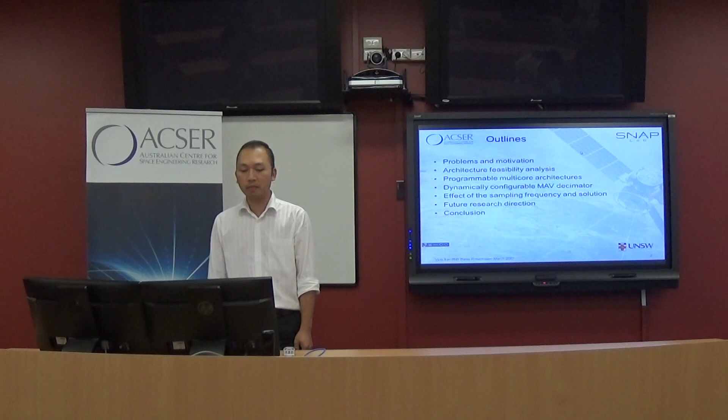That is an outline for today. Of course, everything starts from the problem and motivation. After that, it is my analysis on the feasible architecture that can be applied for multi-GNSS receiver. And after that, some proposed architecture that can be applied for multi-GNSS receiver. And the last thing is some work more related to signal processing, about the effect of sampling frequency, and the solution for this.

I think it's much more familiar to all of us now, because instead of only GPS, now we have 3 more global navigation satellite systems like Galileo from Europe, BeiDou from China, and GLONASS from Russia. But not only global navigation satellite systems, we also have regional navigation satellite systems like QZSS from Japan and IRNSS from India.

So what happened? It means that now there are more satellites. There is the availability map for the satellites. We can see that Australia is one of the areas that have the highest coverage of satellites. So we have a lot of benefit from this.

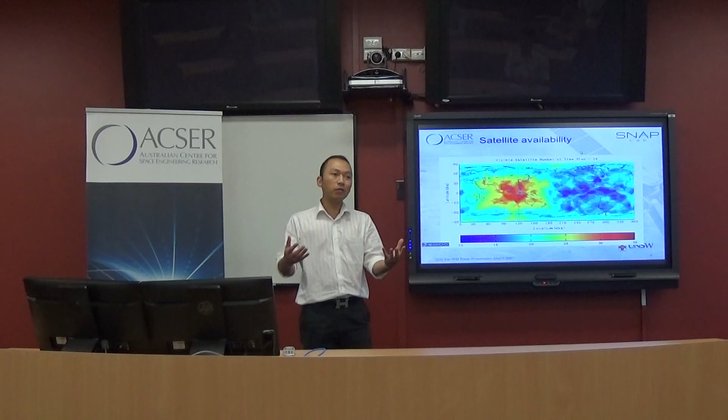Not only that, now we have more satellites. Of course, more satellites mean that at any time, instead of only 4 or 5 satellites, you can have 10, 12, or maybe 15 satellites at one time. And the second thing is that if we can integrate all of these satellites together, we can improve the accuracy and increase the integrity.

Yep, that is some motivation for this. The first thing is the urban canyon. When you drive through the urban canyon, sometimes, for example, when I drive through the CBD, instead of showing on your navigation, like TomTom navigation, that you are driving on George Street, it will show you driving on Flinders Street or maybe Elizabeth Street.

So the problem here is that the urban canyon blocks the signal. Instead of receiving the line-of-sight signal, you will receive some reflected signal. That's why the navigation receiver will show you the wrong position instead of the right one.

So if you have more satellites now, you can receive more line-of-sight signal. The second thing is, of course, for surveying, that's precise positioning - you can improve this. And also for aviation and for agriculture. With aviation, you can improve the accuracy for the auto-landing system, or improve things like the self-driving tractor, and also self-driving car.

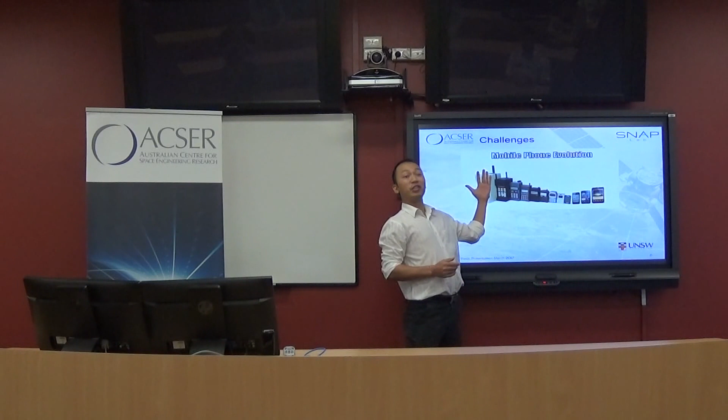But there's also always a challenge. There is the mobile phone evolution. You can see that it's gone from very brick-like, getting smaller, and now large again. So that is the benefit here, that the small thing can help you reduce the size.

But because it's integrating too many chipsets onto one chip, power consumption becomes a problem. And now, for the important smartphone with the big LCD screen, it's going to consume huge power. So battery becomes the trouble. That is the trouble of the battery - performance versus battery life.

It also affects the GNSS receiver the same way. With a single chip receiver, you can have more battery life, but if you want to integrate more receivers inside one, it requires high power consumption.

So starting from these challenges, I try to classify some physical architecture that we can apply for a multi-GNSS receiver. I separated this into two big categories: the first one is software receiver, and the second one is hardware receiver. This is the first attempt to classify it like this.

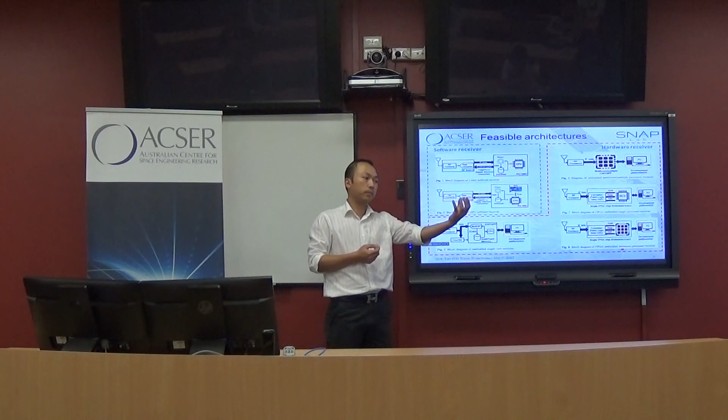For software receiver, we have the full software receiver. This means you only need the receiver connected directly to the PC, and everything you process on the PC is a software receiver. The second one is using the GPU, meaning using the graphical processing unit to process the signal. That is for software.

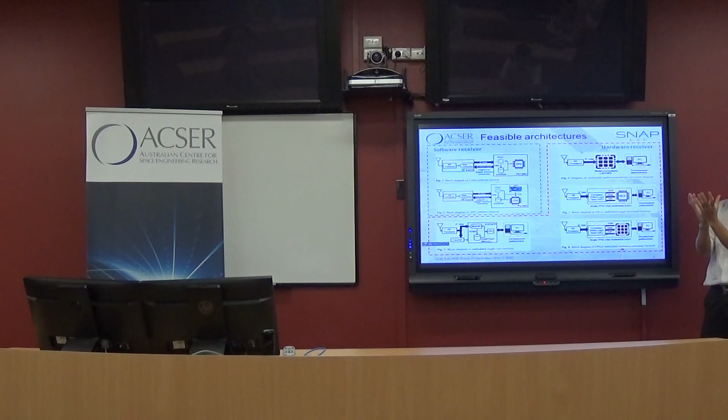For hardware, we have four more types. The first one is the embedded single core processor. The multi-core processor means you have a board, and this processing, instead of using the PC, is now like an MCU or a chip inside a board, processing like a receiver. The last one is where we try to integrate everything inside one chip, from a single core to multiple cores.

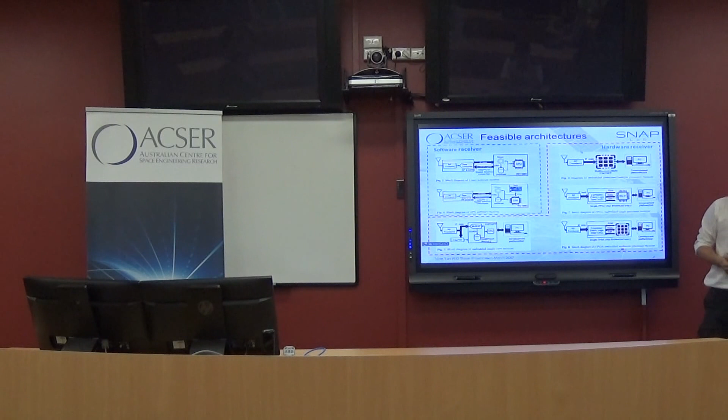So what's the problem here is that we have too many options. How can we evaluate this? What is the feasible architecture, and which one is the most suitable for a multi-GNSS receiver?

With this demand, I propose a cost function that can evaluate all of these architectures based on 6 characteristics. The first one is development cost. It means how much money, how much manpower you need to develop a receiver.

The opposite of this is programmability. It means how you can reuse all of your resources. For example, with a software design, you can reuse your class designs or methods when you want to combine and make a new one. But for a hardware receiver, you can't do the same thing.

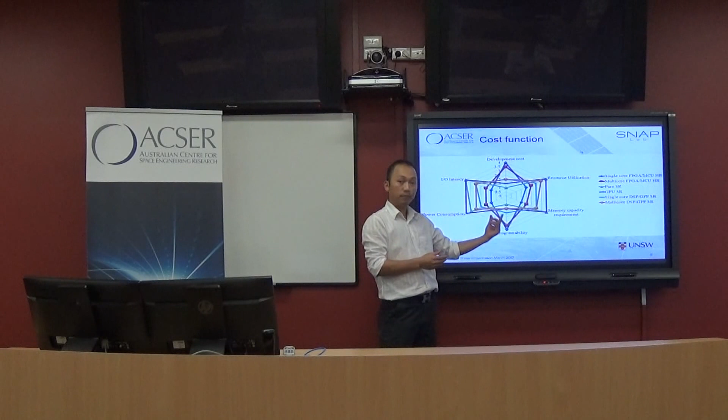The other characteristics are power consumption and resource utilization. Of course, more resource utilization also means more power consumption, and vice versa. The last thing is I/O latency and memory capacity requirement.

The important thing here is that when you receive the signal, it goes straight from the front end. So if the I/O latency is very high, then you need memory to store the data before you can process it. But if you can process it immediately, you don't need memory to store the data beforehand. So these are the 6 characteristics I propose to evaluate the physical architecture.

In this case, I try to normalize all of these characteristics and draw them in a web chart. You can see here that none of the existing architectures can provide the minimum requirements for a multi-GNSS receiver.

So from this, I propose 2 more architectures that, in my estimation, are much more suitable for a multi-GNSS receiver. The first one I call the fully programmable custom core.

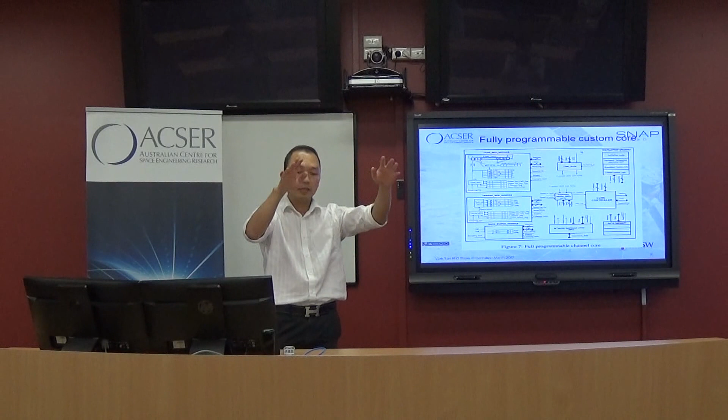Usually in the design you have the correlator inside an FPGA, and the tracking and acquisition can be on a PC or an MCU. So I try to put all of this into one chip and design this core with a dedicated instruction set, only for GNSS receivers.

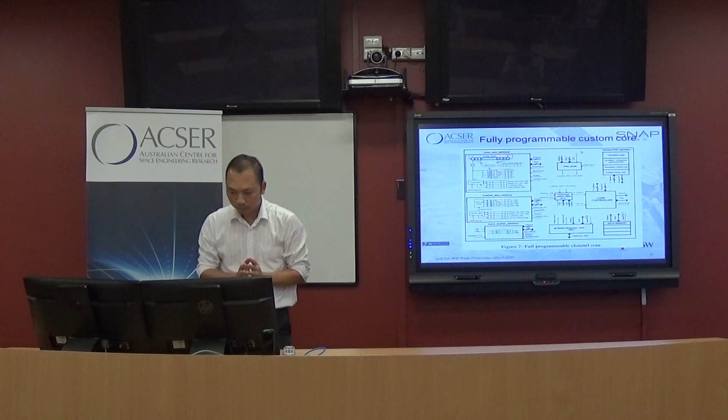And this is the memory map, along with some instructions and quantities. After proposing this, I also apply the cost function to evaluate it, and you can see that in this case it can reduce these costs.

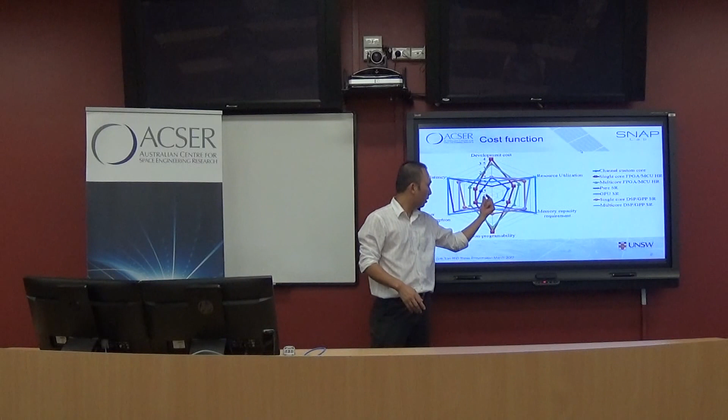But it's still not the most minimum one I need, because the problem is the constraint on processing speed for the custom core. I designed only 16 bits for the data part, so it can only process 16 data samples at the same time, and after that I have to repeat the routine again. Because of this constraint, it's only suitable for doing the correlation.

If we also want to do acquisition and tracking inside this custom core, it can only provide support for GPS L1 CA. But if you also want to use this for L2C, L5, or E1, it's not suitable.

So the problem here is that it only comes from the correlator, because the correlation has to keep real time, and every time you receive one sample, you have to continue and keep processing it.

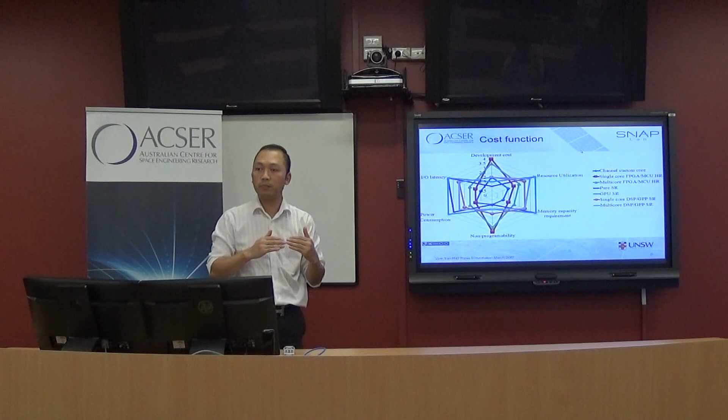So I propose the other architecture here, a new dedicated pipeline correlator connected to the core controller, with the channel counter and the graph selector to process this. I'm starting from this idea.

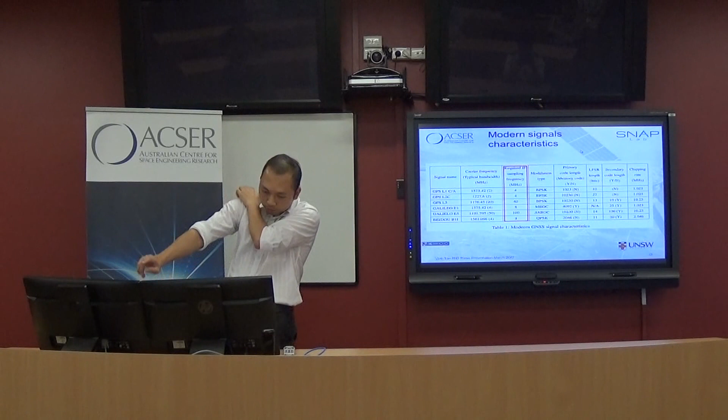For all GNSS signals, the required IF sampling frequency is usually very low, like 4 megahertz, and at max only like for E5 it's like 100 megahertz. But it's still much lower than the processing performance of the FPGA.

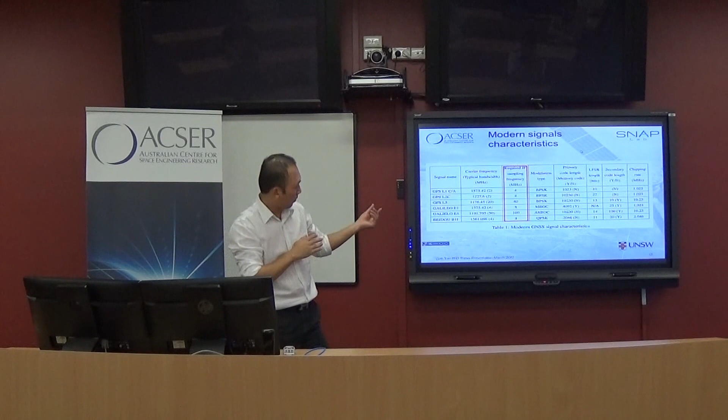So instead of doing this in serial, why don't we multiplex this? It means that in one hardware, you multiplex to process multiple channels, because the processing speed requirement here is very low.

So to do this, I propose a programmable pipeline baseband circuit. It's still doing the same thing.

But now, because of the lower processing speed and inheriting the advantages of RAM-based register over register-based register, with this architecture I can directly program and multiplex process like 16 GPS L1 CA channels in one resource. In that resource, for only one channel: 8 BeiDou, 4 Galileo, and 1 GPS L5 channel, in only one design.

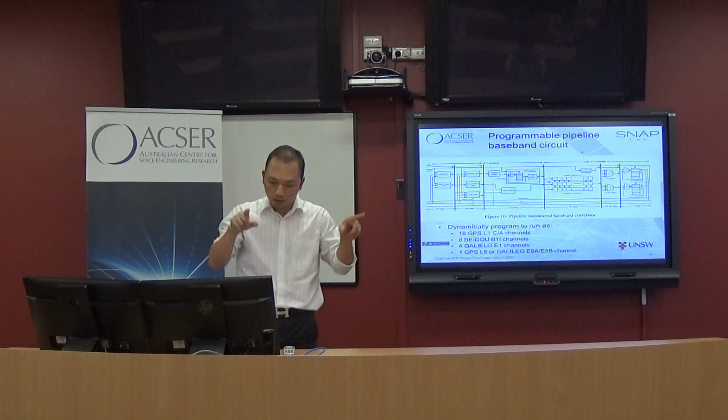So in this case, you can see that resource utilization is significantly reduced compared with the conventional one, and also with the fully programmable custom core. It only consumes like 5.2% of resource utilization, and the power consumption is also reduced.

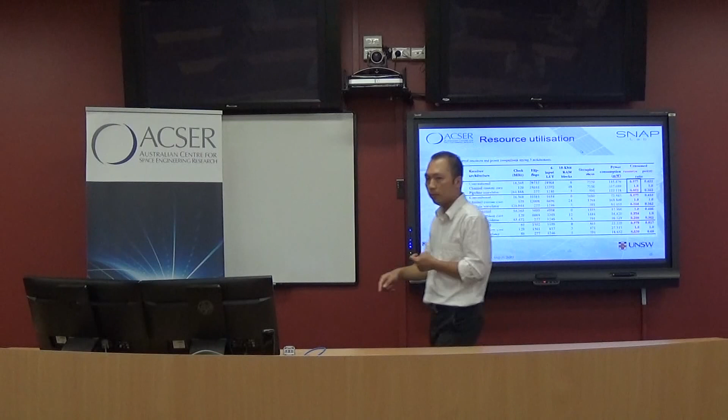This is the comparison for power consumption. In all cases here, when I configure this architecture to process, it only has the smallest power consumption, and at least it can reduce nearly 50% of power consumption.

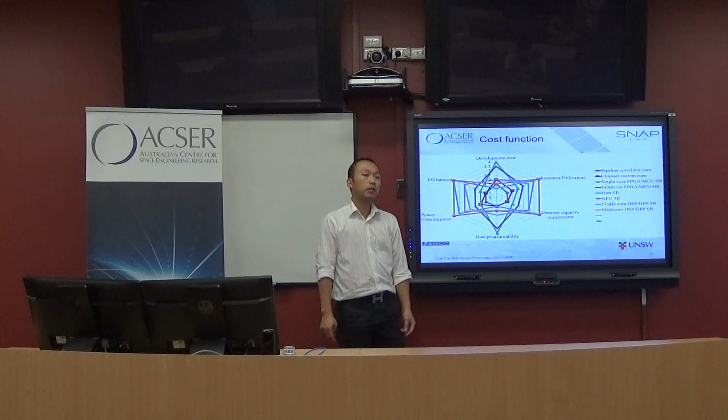And finally, when I apply the cost function to evaluate, the pipeline correlator programmable architecture has the minimized cost function, or the needed one here. This programmable architecture has the lowest cost function.

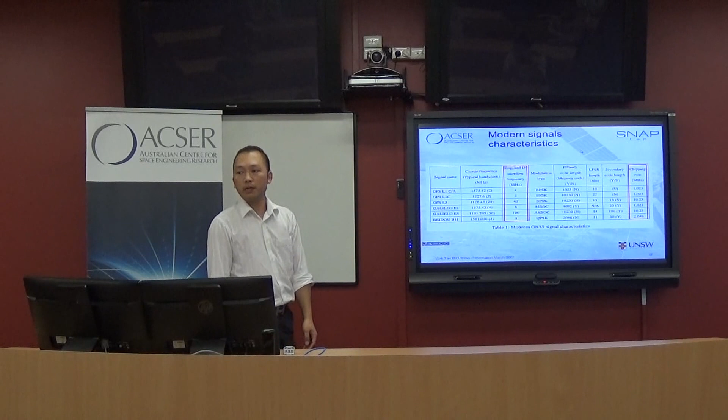The other thing here, from the modern signal characteristics, is that the sampling frequency is usually a bit like 4 times higher than the chip rate. So after we wipe off the carrier, we don't need to process at very high speed, because if we increase the speed, it also increases power consumption. If we can reduce the processing speed, we can reduce the power consumption.

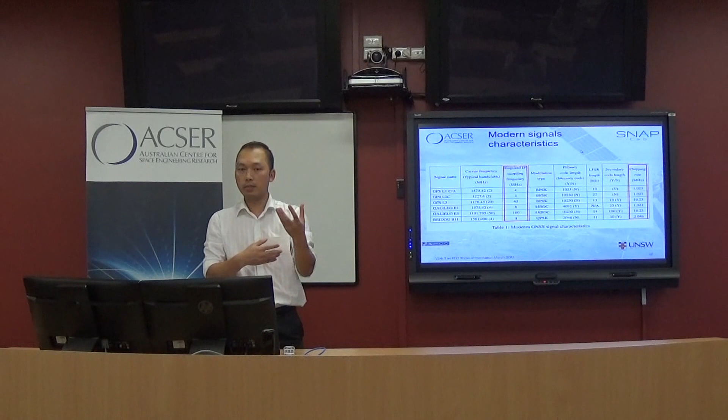So starting from this idea, because the sampling frequency is too high, if we can decimate or downsample the sampling frequency after we down-convert the IF signal to baseband, we can reduce the power consumption.

But there's always a problem with decimation here: when we decimate any signal, we need an anti-aliasing filter, otherwise we get aliasing from the high-pass signal. Usually for other decimation filters, they use a very complicated filter to remove the aliasing.

But here, I started thinking that when I try to draw the frequency response of the moving average filter, for example 4 times moving average, this is the frequency response of that.

And also the correlation is also working like a second filter, because this is the matched filter when you try to match the local code with the incoming signal. So it's also like a second filter here.

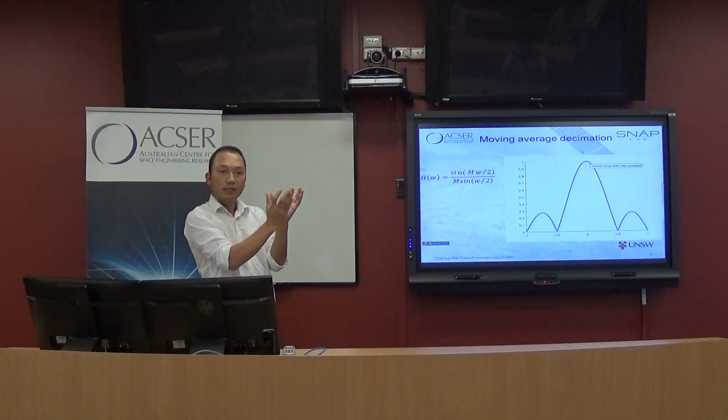So instead of only filtering the signal here, the anti-aliasing filter is working at filtering the power signal, this is the power spectral density of the spreading code signal. After we apply the filter, you can see that of course we lose some signal, but the shape is still the same.

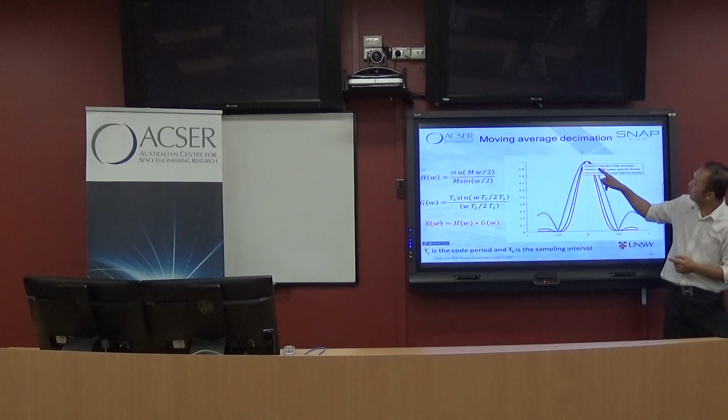And the most important thing here is that the main lobe is still kept the same, but we can also reduce the side lobe. So that's very good for tracking the BPSK signal.

So this is the conventional, they call this the recursive MTAP, MAV, the moving average decimator architecture. If you want to have an MTAP, you need at least the MTAP and bit register. After moving through this, we use the adding and the subtract to get the output signal.

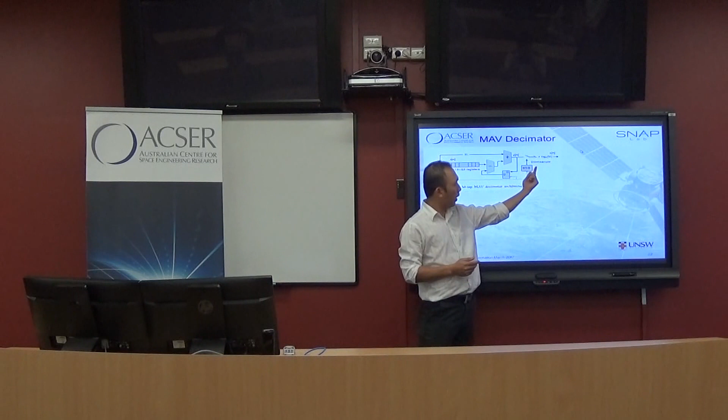Every time after this, if you want to have the downsample rate, you need a ratio to get the frequency you want to downsample. But in this case, it's very difficult to make it become very configurable, because every time you want to do this, you have to enlarge or make smaller the number of registers you need here. So it's not suitable for making it become very configurable.

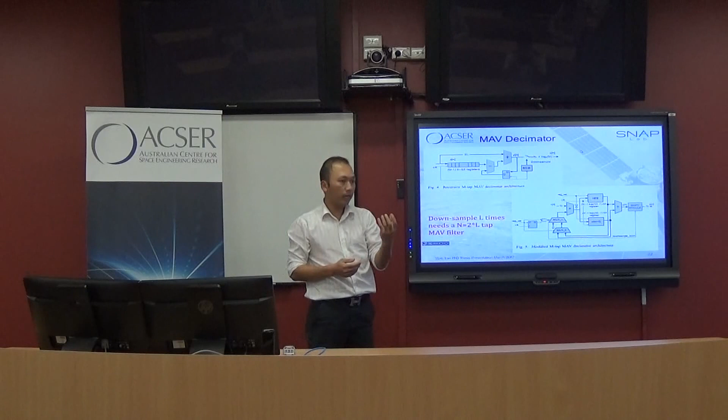So I propose a new MAV decimator here. The idea is that we always try to downsample as a power of 2. If you want to downsample by L, we need N equal to double of L for the decimator. With this, you can separate it to store in only 2 registers, and use the latency signal to get the output signal here.

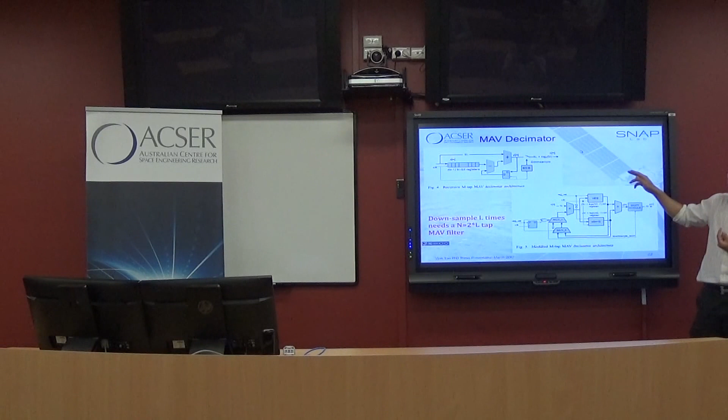It's like power of 2 times power of 2, the power of 2 division of the input sample rate. The other thing here is, because they only have add and subtract, the output bit will increase. But in my case, because it's only a power of 2, I only need to use a modulo to make it become exactly n plus 1 bit. So we don't need more bits, and we can still reduce the resource consumption.

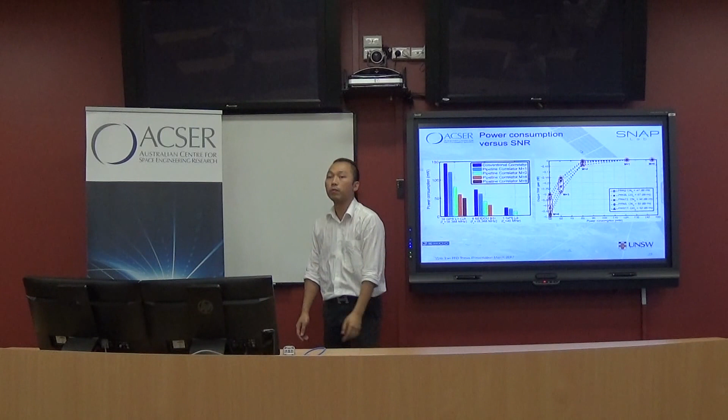Also in terms of signal to noise ratio, the output signal after correlation, we usually have like minus 0.5 dB. So this is the loss of signal power in terms of the signal to noise ratio. So it is still worthwhile to do this here in terms of saving power.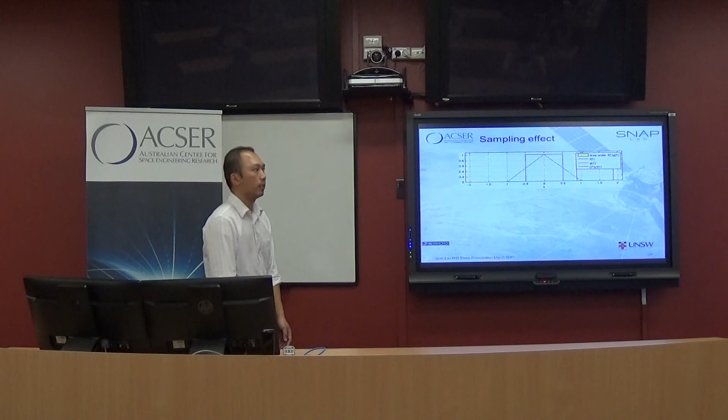The last thing is the same effect of the sampling frequency - that's much more of a signal processing thing. Before, when I read through the literature about sampling frequency, especially for BPSK signals, they think we always have a triangle for the correlation, the auto-correlation of a BPSK signal. But that only happens if the signal is continuous, like in this animation. Actually, we never have a continuous signal, because all the signal we have is the sampled signal, which is discrete. You can see here.

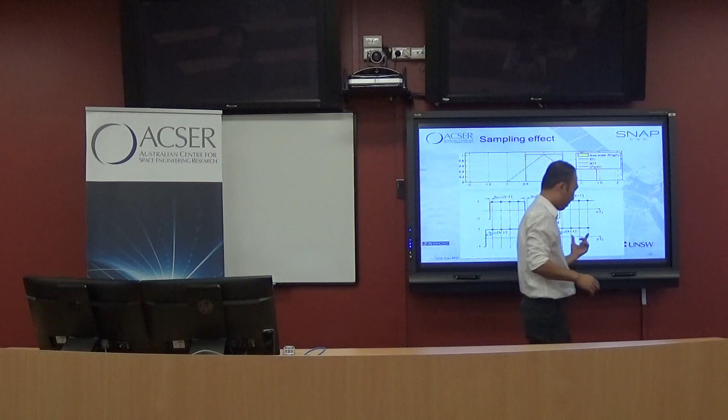So with the same input signal, we can have two different locally generated signals, and the alignment here is different, but the correlation value, the autocorrelation value you have, is still the same.

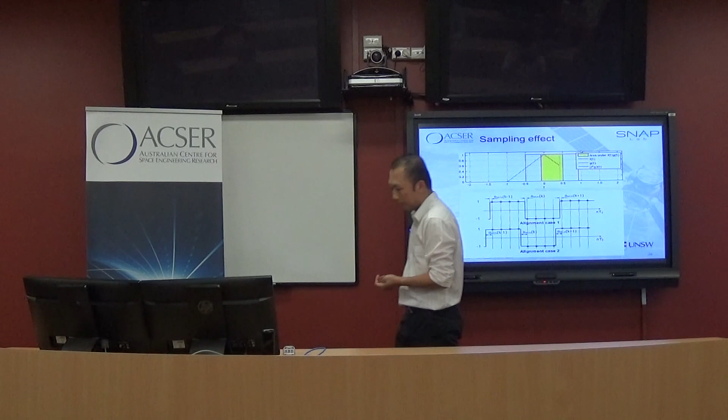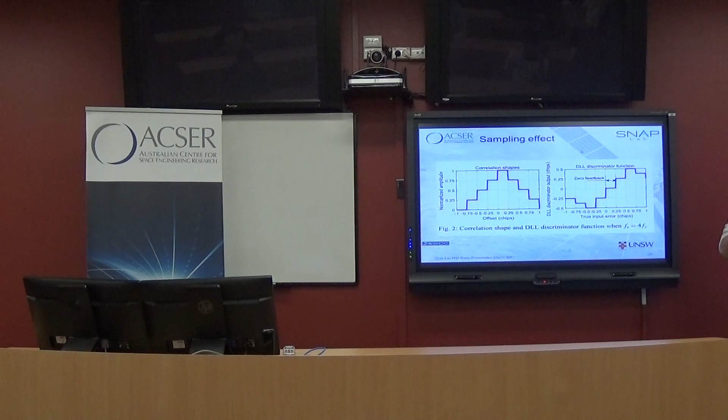Because of this effect, the correlation now, instead of a triangle, becomes like a staircase. With this staircase, you can see that instead of a very sharp peak, it becomes a flat peak. This flat peak affects the DLL discriminator function, leading to a zero feedback area. During all of this area, the discriminator function doesn't work - it doesn't give you any change. For all the changes smaller than this area, the DLL discriminator function can't detect it.

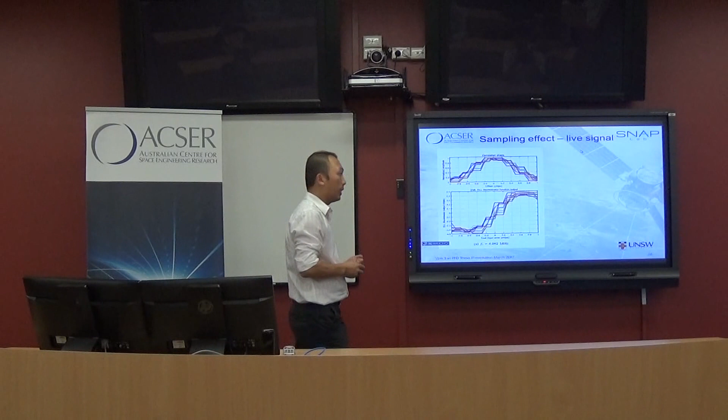So we tried to test it again with the live signal. The result with the live signal, when we try to extract, is when the sampling frequency here is 4 times the chipping rate, you can see this problem appears clearly. But after that, when we try with only a 1 kilohertz difference of the sampling frequency - here it's 4.093 megahertz - all of this problem disappears.

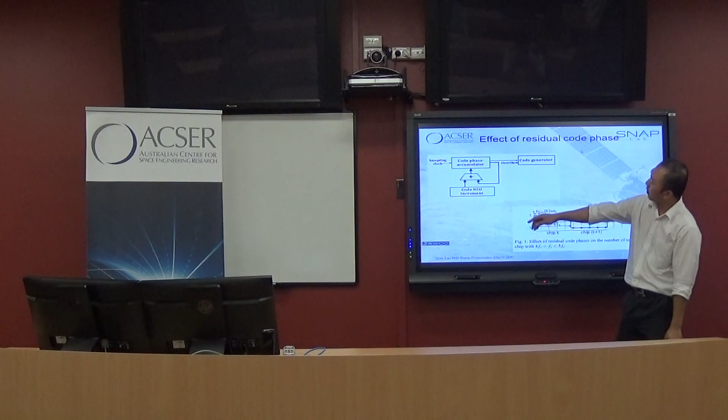So why does this happen? The problem is because of the effect of the residual code phase. The residual code phase here - this starts from the code oscillator generator. When you want to generate a local code, you need an oscillator to generate the frequency.

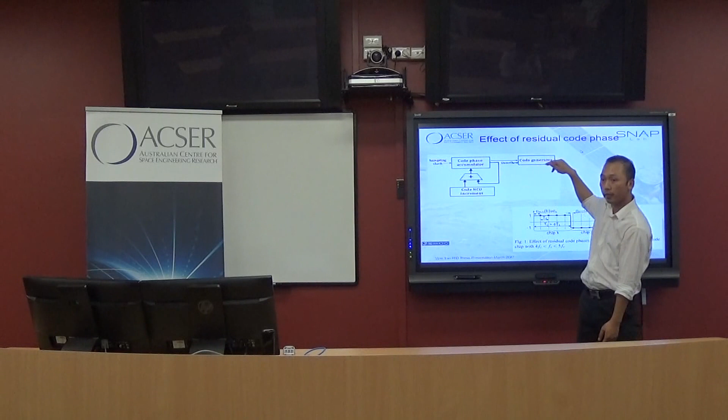So we use the code accumulator and the increment. By changing the code increment, we can change the frequency, the output frequency. But because it's in the digital domain, after the code accumulator overflows, it will generate one pulse. But the remaining value of this code accumulator is the residual code phase.

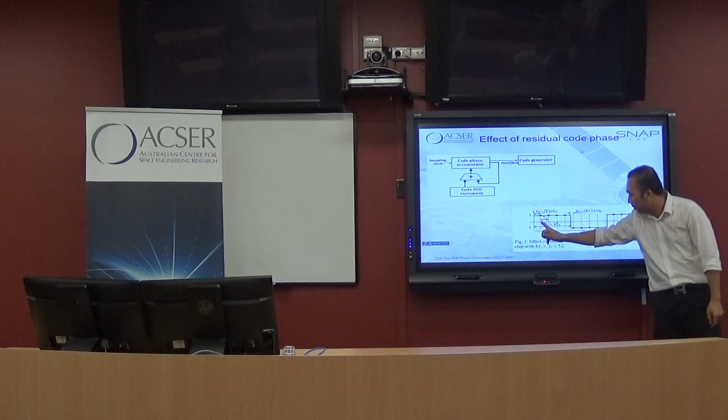Or in terms of time, you can see it here. This is the time difference between the start of a code chip, of the locally generated code chip, with the first sample input of the incoming signal. The first code is this one, the second code, and for the third code, that's one. And now with this we can see the effect of this.

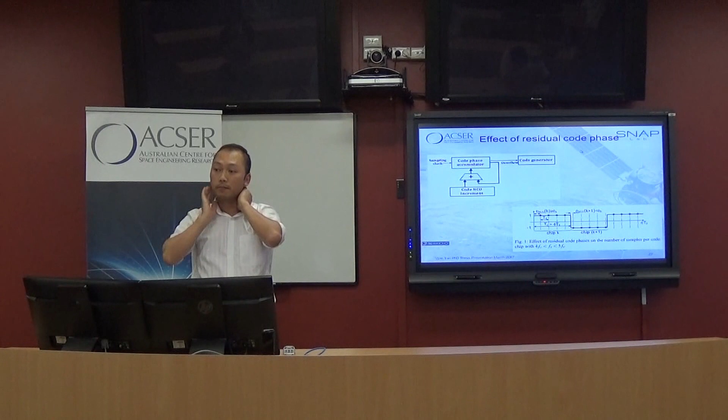And we try to use some conventional results from other expert research to measure this problem. But when we try to do this, to derive the tracking error, we applied the methods proposed by Betz. I think that's from the Betz paper, and after that they applied it in the Kaplan book everywhere. People use this when they want to estimate the DLL tracking error.

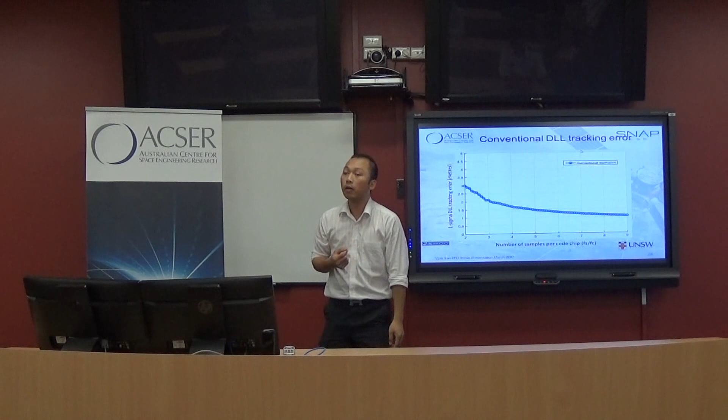But here now I try to draw it when we're changing the sampling frequency, with a step of like 0.1 sample per chip. You can see that all the error is very small, the maximum is only like 3 meters here. But the real one, when we have it, is much more than that.

So I try to propose a new one that can be much more accurate in estimating this. And this is the one we have, with the proper one. You can see that now, instead of a very small error, when the sampling frequency is an integral time or rational multiple of the chipping rate, the error is significantly increased.

So one of the problems here is that they haven't taken into account the effect of the residual code phase. So now we try to find a solution for when the sampling frequency is an integer time. After comparing all of this, we find out that the problem is the residual code phase and its distribution. Because when the sampling frequency is an integer multiple of the code rate, the residual code phase is like a constant for each code chip, and that's why it leads to significant error.

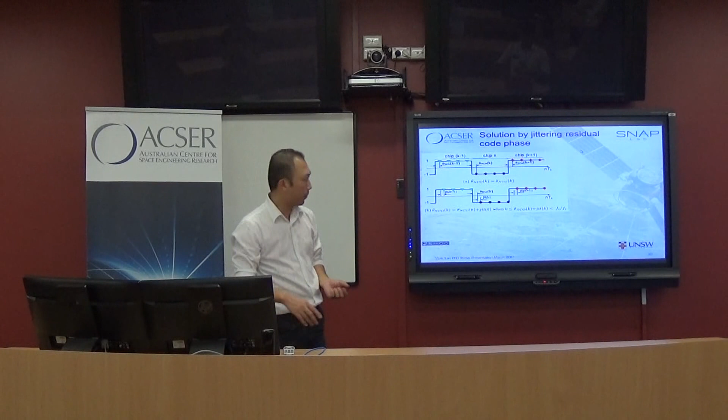So if we can design the system so that this residual code phase is distributed uniformly inside the sample interval, we think that maybe it can help reduce the effect. So this is the solution here. For example, when the sampling frequency is 4 times the chip rate, all the residual code phase is constant.

So now we try to jitter it, by adding a random value here. But the problem when you jitter here is that sometimes the generated code chip doesn't still belong only to this chip, it may belong to the next chip or the previous chip. So we have to take into account this problem.

So after we apply all of this, this is the efficacy of the solution. You can see that the distortion looks totally averaged out with 3 proposed solutions: the sawtooth jitter, the random jitter, and the soft jitter solution. In this case, the random jitter solution and the soft jitter look better than the sawtooth jitter.

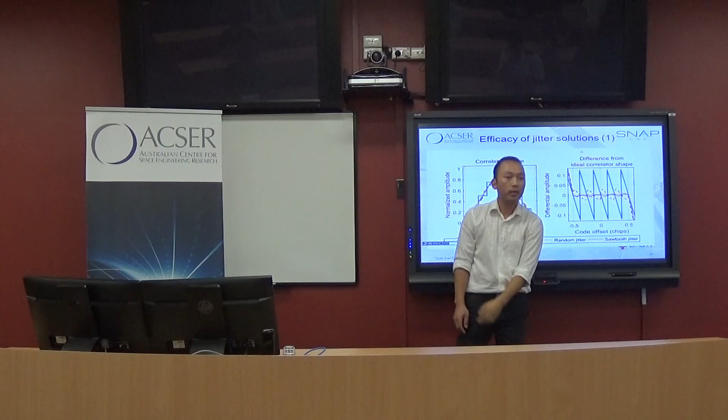And this is the DLL tracking errors when we apply this solution. You can see that instead of providing significant errors, now we can reduce them significantly. And this is the theoretical solution.

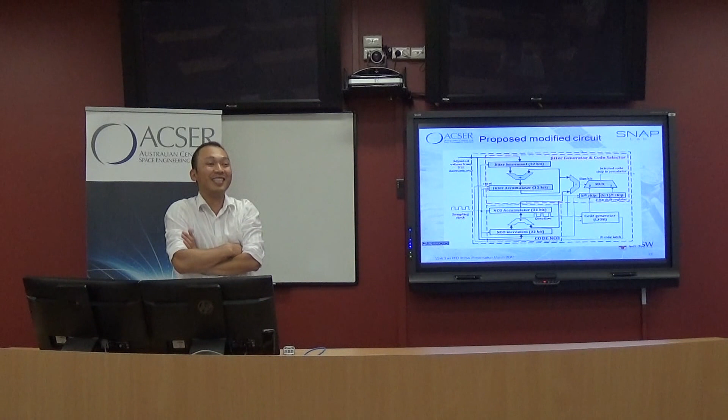Now, how can we apply this on the circuit? To apply this on the circuit, we are trying to add another layer. Instead of a normal code generator, we still do the same here, but now we add another layer on top of this to generate the jitter value and also to select the code chip that we want to use.

The thing here is that because of the code chip you need, you can only have the K chip, and you can't have the K chip and the K plus 1 chip at the same time. But you can always easily have the K chip and the K minus 1 chip at the same time and put it through a register. So the solution here is that we try jittering, using only the negative jitter instead of positive jitter. In this case, you can choose the code chip you want using only a shift register. This is the solution for the conventional architecture.

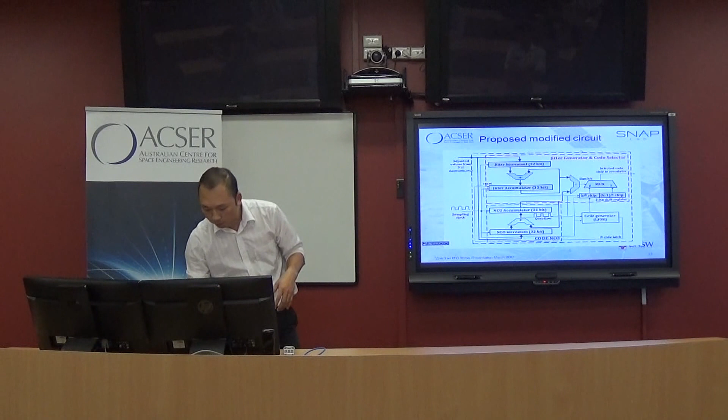But now, if we want to apply this for our proposed RAM-based architecture using the pipeline correlator, we also propose another approach: a RAM-based design for this. It's almost the same, but instead of registers, we replace all the registers with the RAM-based design.

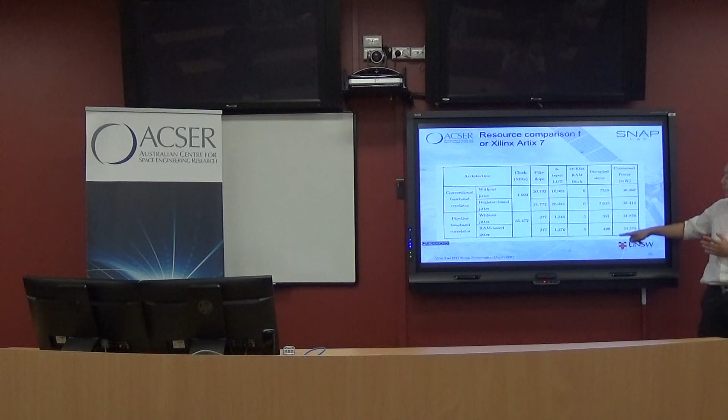So in this case, when we're adding this directly to the conventional architecture, the resource consumption increases very small, nearly 300 slices for the conventional architecture, and the power consumption also increases very small, only 2 milliwatts. But if we apply this for the pipeline, we can also reduce the resource consumption and power consumption.

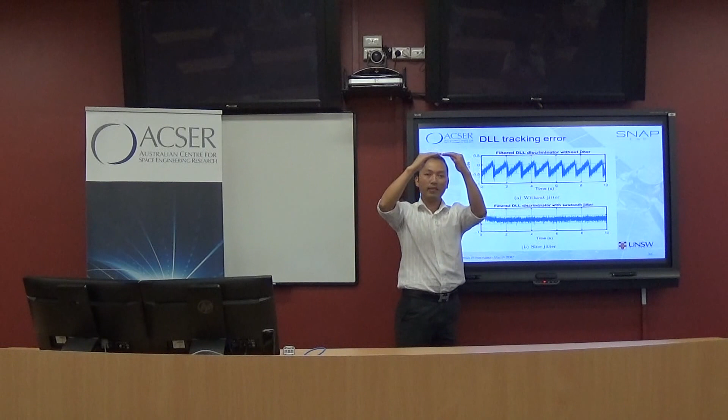There is some experiment result I want to show. This is the DLL tracking errors versus the sampling frequency, for time and interval time, before we apply the solution. You can see this heartbeat pattern, which is because of the flat peak, so during all of this, the DLL discriminator can still give the right result.

But now after we apply this solution, you can see that all the errors become very small and smooth.

This is the table which shows the result for all of this. This is the DLL tracking errors with the live signal. Without the digital solution, you can see the error can be from 16 to 22 meters, depending on the power of the signal we receive.

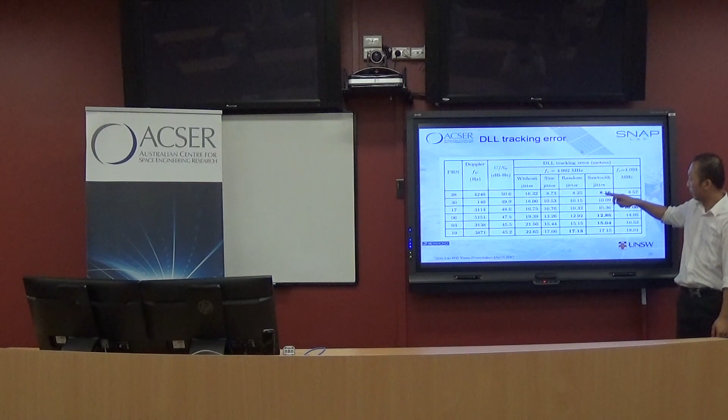But after we apply this, you can reduce it significantly compared with the one. The sampling frequency average is 4093, where we can see it's very smooth. You can see that in some cases our solution is better than applying the solution for the integral sampling frequency, still better than the irrational sampling frequency here.

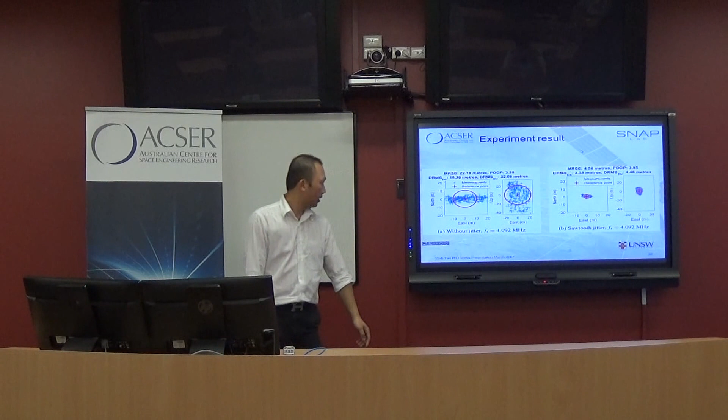And this is the last one, for the deviation of the variation of the position. Without applying the jitter solution, you can see the position variation is very high. After we apply this, you can see the position is much more precise. This can reduce the DRMS here by around 4 times.

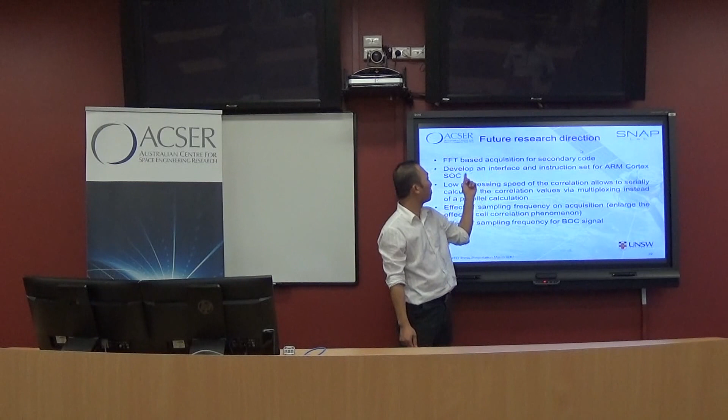There are some future research directions. The thing I haven't mentioned is the effect of the secondary code on the signal. This is another problem we need to deal with, because for modern GNSS signals we have a problem with acquisition of the secondary code. One way is that instead of using FFT only for the primary code, we're thinking we can also use FFT acquisition for the secondary code.

The second thing is that nowadays, with the development of new FPGA chips and system on chip, we have an ARM Cortex inside an FPGA, and besides that we have very huge fabric FPGAs. So we're thinking of implementing a system on chip receiver, combining our proposed architecture with a new interface and instructions for the ARM Cortex chip.

The third thing is that because we can decimate the baseband signal, we can reduce the processing speed for the correlation. So instead of using parallel correlation, why don't we also multiplex the correlation to do it serially? This can also reduce the resource consumption.

And the last one is about the effect of sampling frequency. All the effects of sampling frequency I've investigated here are only for tracking, not acquisition, so that's something we need to deal with. Before, I had read some papers talking about the effect of the cell correlation phenomenon, but in that case they only considered the effect of the Doppler.

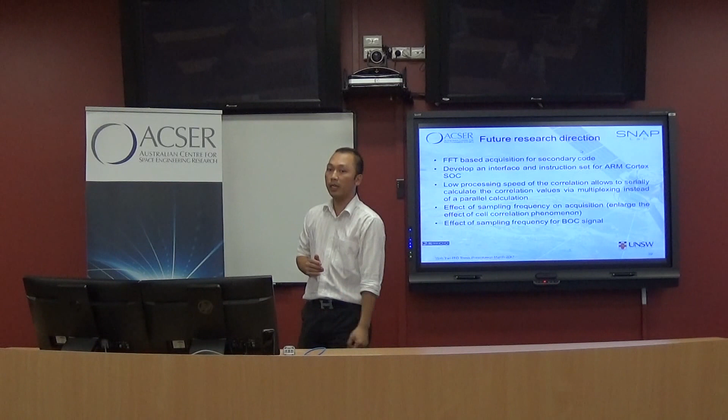But now we also need to account for the effect of sampling frequency, which will be a much bigger problem for the acquisition. We will take into account the effect of sampling frequency, especially to reduce the time to first fix the signal. And the last point is that all of my investigation is only for BPSK signal. But how about the BOC signal? That's still a question. That is all of the summary about my thesis. Thank you.

Can you go back to your staircase plot, right near the beginning? Actually stop, go forward again. I'm looking at that error, that one on the right. That's actually wrong, isn't it? If you look at it on the left, it should be sort of downward sloping, and then on the right-hand side it should be upward sloping.

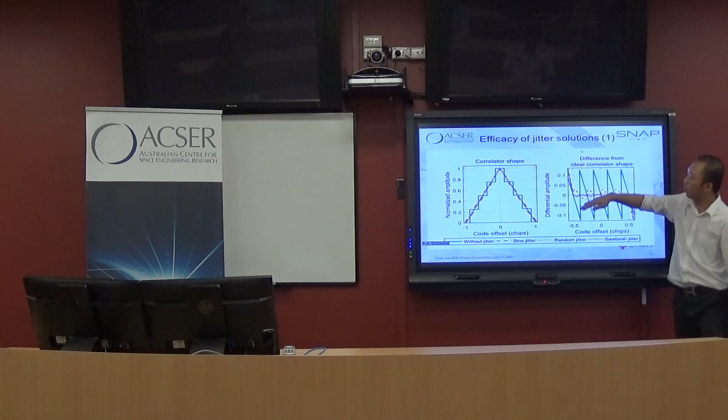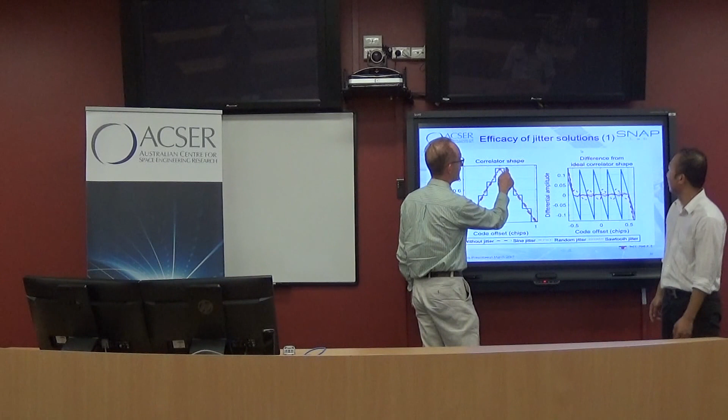No, this is when we compare this with the ideal one. Yeah, and what I'm saying is, if on the left, this blue line minus that, then it should be positive there and positive there, so it should come down to zero and then up again. No, but this one is below the line, and then this one is minus. Look, zero, right? Zero is positive on the left-hand side and positive on the right-hand side. That's positive and that's positive. So this should be positive and that should be positive.

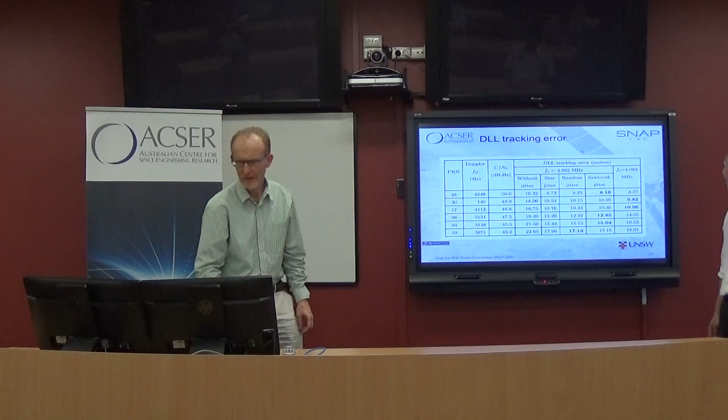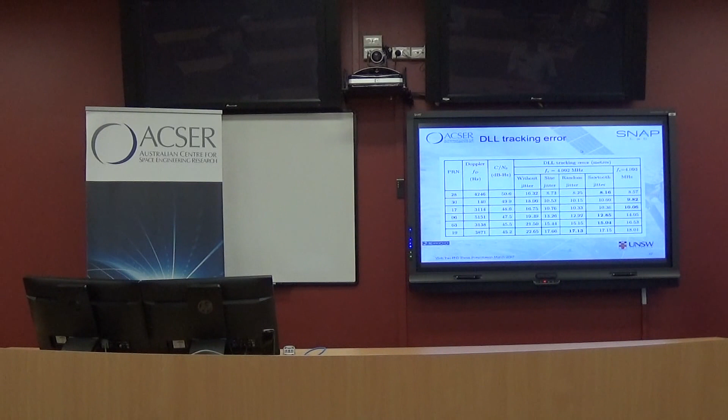Because when just looking at that, you would expect if you're comparing the very right-hand column to the 4.093, then maybe that's supposed to be ideal, right? Because it doesn't have any of these staircase effects in it. Then it should always be better than the jitter, because the jitter itself has introduced some noise. Or is there actually still some of this effect we're talking about still in the 4.093, and the jitter is removed completely from the left-hand side?

Yep, because you've got your columns there. Sometimes the 4092 is better, sometimes the 4093 is better. So I think the point here is that in most cases the 4093 is always better, but in some cases when the signal is strong, or maybe combined with the effect of the Doppler, that gives a better solution.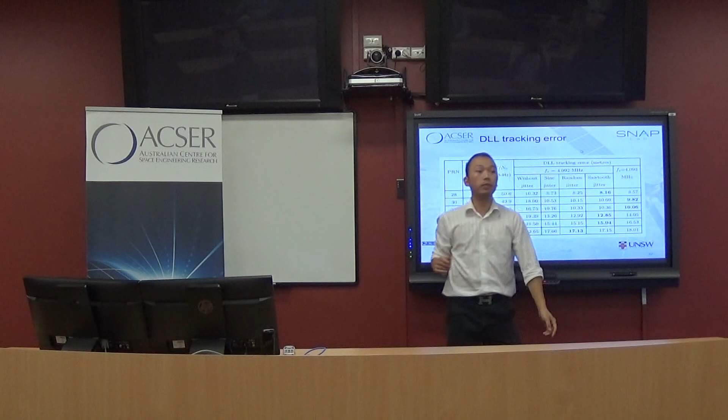Okay, so they're listed in order of their C/N0. Yeah, it's in order of C/N0 and also the Doppler, because the Doppler here also contributes to the jitter. So in some cases it gives the jitter a better result, and it leads to the worst result for the others. Oh, you mean sometimes the Doppler helps you? Yep, sometimes the Doppler has this effect and this leads to this one.

I've got a question. One of the reasons why you get big benefit with your pipeline approach is you're kind of using the resources that are built into the FPGA, namely the memories. Yep. A lot of FPGAs now have internal math blocks, like hardware adders. Did you end up using those? Actually, I haven't used all of this hardware and the block. So I developed all of this from like a very simple FPGA block.

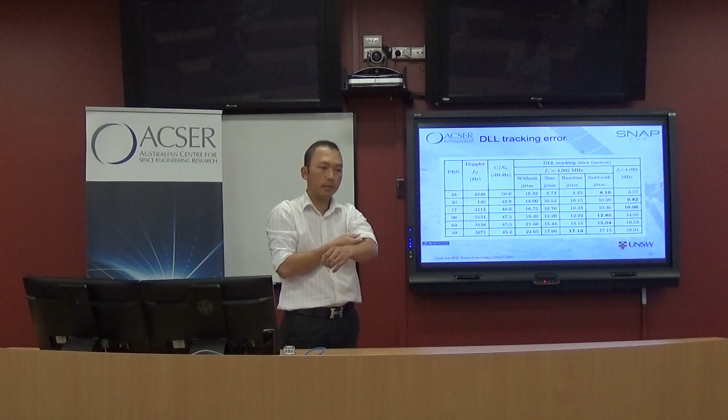And it's always Xilinx, right? Yeah, but Xilinx have those math blocks as well. They've got hardware adders and accumulators that are kind of meant to be used for DSP type things. So if you were using those, instead of just building it up with logic elements, it should get even better, shouldn't it? Yeah, I think so, but the problem is that if you want to compare with the conventional one, the easiest way is that we're using the logic element, because all the conventional designs now are using the logic element.

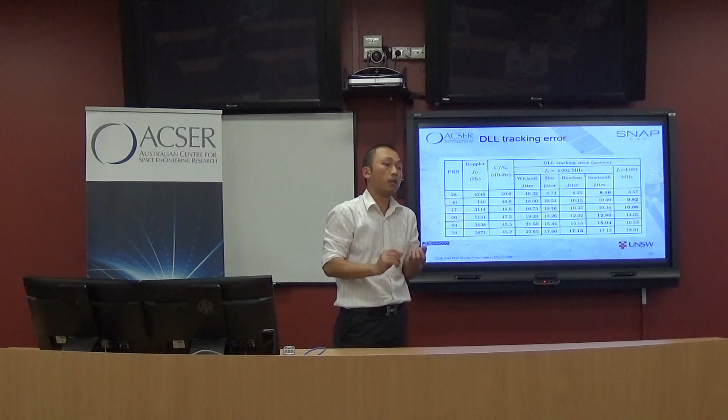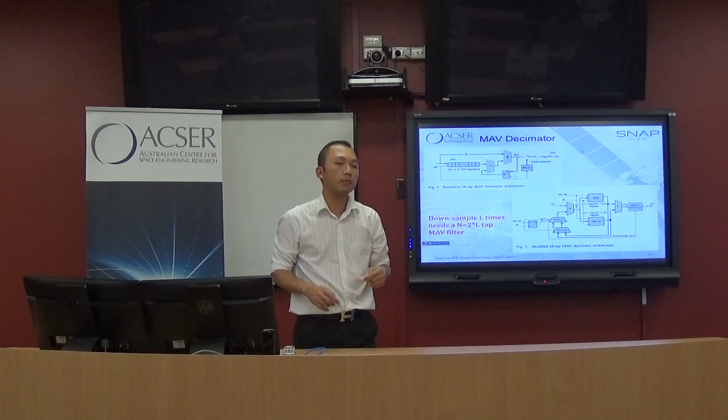And also this is the same thing here. The problem is that I think because this is a little bit different, I'm not sure that we can use the hardware adder here or not. But the input bit here is very high. It depends how many taps you want to use.

Actually, I was thinking of the NCOs. So you store the values, the increment value and the accumulator are stored in your memory, and then you use the address to kind of cycle through each one. But you've still got to have an arithmetic operation from reading one memory and putting it into the next one. Yeah, exactly.

And those would have the same width of your memory, which is like 32 bits. Yeah, that's better than we use this here. But in this case, we develop this by ourselves, so that we can control all of this through the chain and address here.

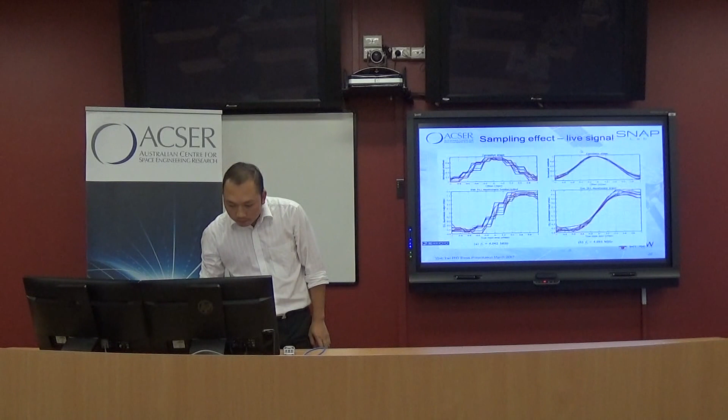The thing here is that it's very difficult to compare all of these characteristics directly. So I have to normalize and separate this into the range from 0 to 4. After you count each direction, that is the development cost direction, so the smaller you want, the lower cost function you have.

So no, I'm talking about those points there. How do you plot those points? How do you evaluate them? Like what criteria? Not what criteria, but how do we interpret this? Because I can see that one particular line is reserved for one particular solution. So these lines are just joined in what way?

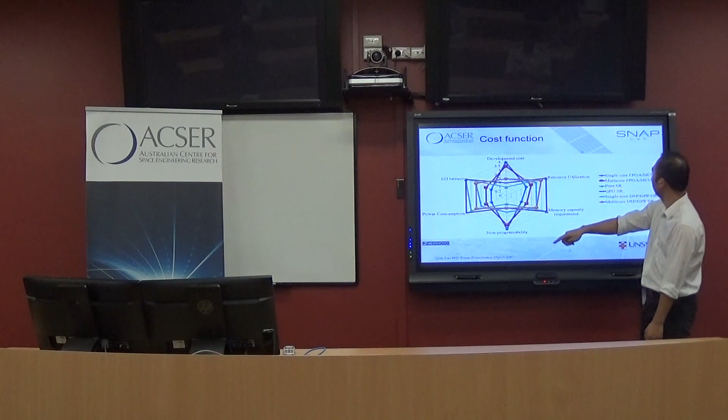It's not joined here, because there is just a draw for each of them. Like for example, for the GPU software receiver, it's the purple line. So the resource usage is the highest one, the memory capacity requirement is the highest one, the power consumption and the I/O latency is the highest one. The development cost is less because it's software, and the non-programmability is small too because you can reuse this.

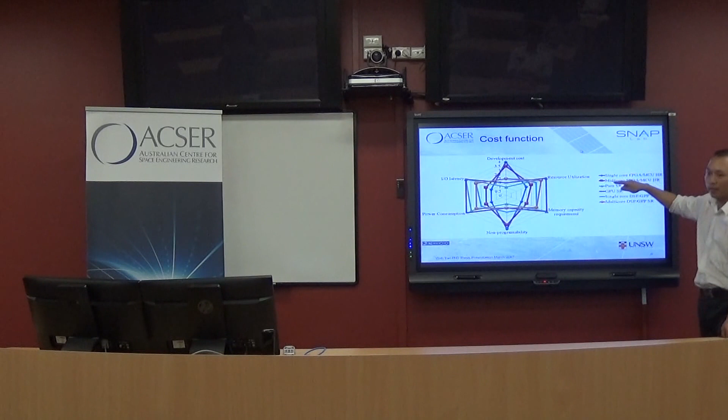Okay, now I understand. So basically, you pick a particular one of these architectures and draw one of them, combining all the metrics together. Okay. And in page 29.

And just while you're still on that, some of those things can be evaluated numerically, and some of them are not. Yeah, some of them you can't. Okay. Are you the first one who came up with a plot like this, this way of evaluating? And do you have a performance metric, like how do you calculate between 0 to 4? I have some function to calculate it. So a performance metric that is mathematical. Yep, okay.

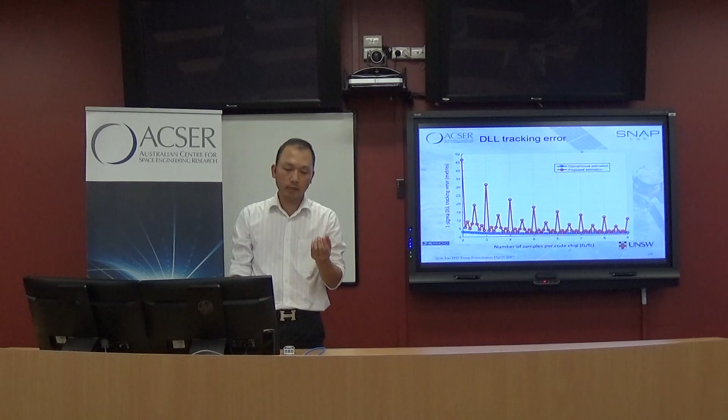And of course, the downside of subsampling is the errors get made even bigger than they were before. So it sort of ties in with your power saving.

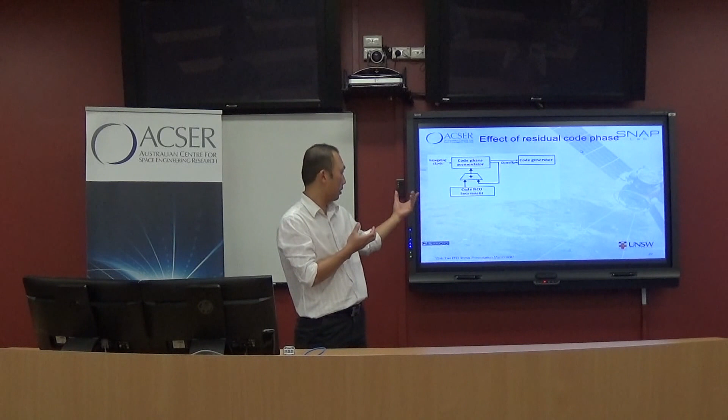Yeah, because the thing is, I'm happy with the decimator here. I try to downsample the baseband signal to like 2 samples per chip, or maybe 4 samples per chip. In this case, this always happens. So that's good, that when we apply the solution, we can omit this.

If you go back to the previous figure, just like this one, does the amplitude change when you have different bits per sample, number of bits per sample? No, the amplitude doesn't change much. That's what I figured. Okay, it's a timing thing, not a signal thing.

Did you look at bits per sample as an issue? I haven't, but I don't think it's important. Yeah, I can't see the mechanism where that would cause it. Will the bits per sample reduce the width of the zero? No, this doesn't affect anything theoretically.

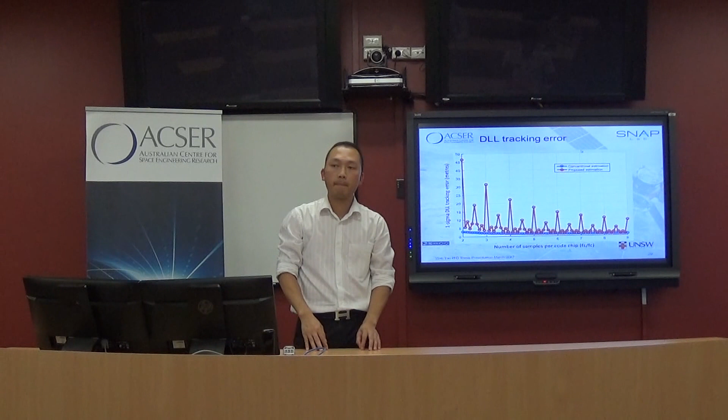Because everything here comes back from the derived discriminator function, the output of the derived discriminator function. What you might find is for low numbers of bits per sample, because your C/N0 goes down, you may actually find that for low bits per sample your remedies are actually better.

It may be that the problem itself isn't changed, but the way the remedies work is different.

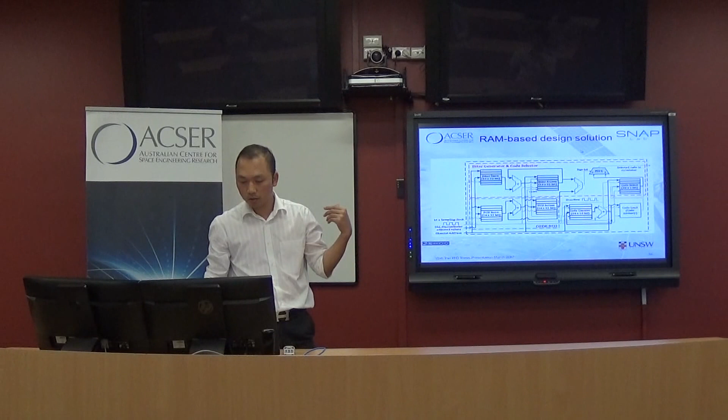I think that actually here, for all of these results, I have 8 bits per sample. If you go down to 1 bit per sample, I think it will be more exaggerated. All of the results I have here from the plots are with 8 bits per sample.

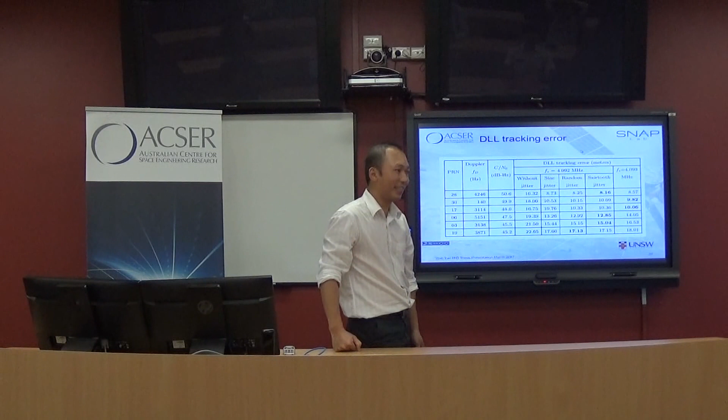Because we do know that the tracking error changes when you change the sampling, that just adds to your future work. Good research always has more future work, so that's good.

Okay, anything else from anybody?

All right, okay, so you young researchers who are still going, you can be inspired now by this brilliant piece of work from Vinh, all of his results there. Lots of what I like about this work is how visual it is, you can actually see what's going on, which I think makes it easier to understand in many ways.